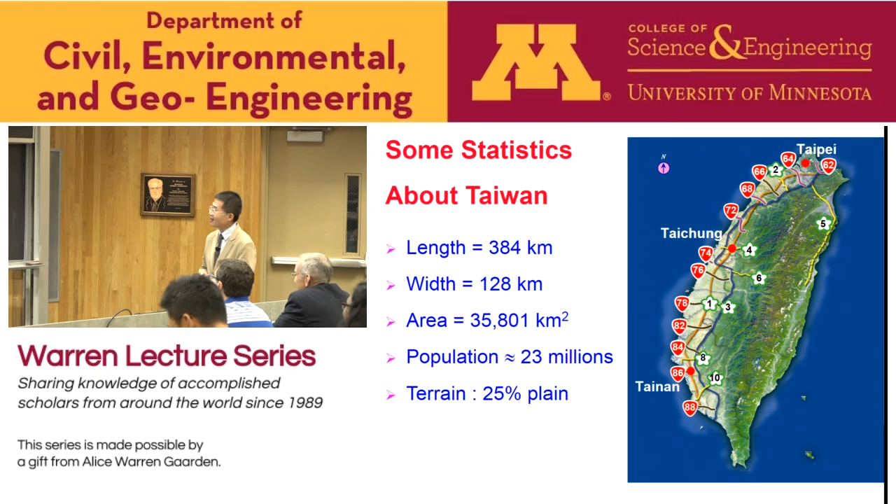Taiwan has a population of about 23 million people. It's one of the most densely populated areas in the world. The shape of Taiwan is like a sweet potato, so people in Taiwan like to call themselves children of the sweet potato.

That's Taiwan. Taiwan is characterized by the contrast between the rocky mountains in the east and the flat plain area in the west, where most highways are built. This number here indicates the highways.

We have three big cities: Taipei, Tainan, and Taichung. Tainan is the city where I come from.

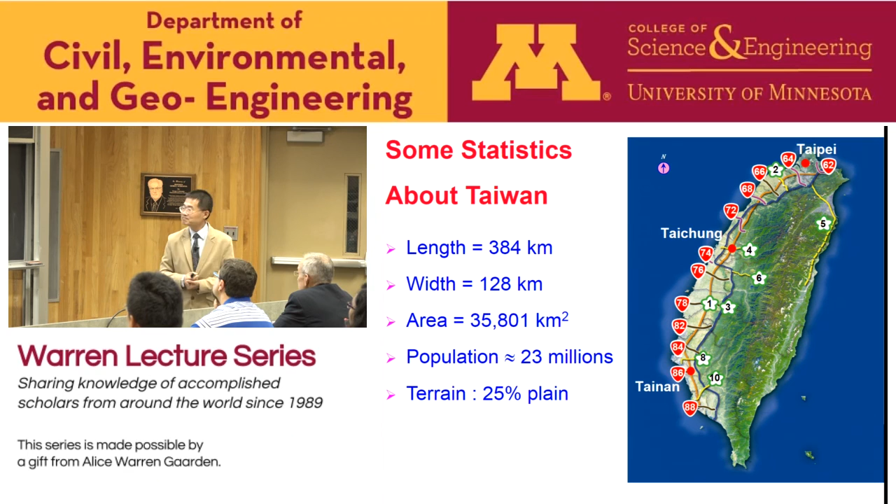Because of its magnificent landscape and cultural diversity, Taiwan attracts many visitors from around the world. Professor Marastino's daughter went there last year, and Professor Gananovich went there two or three years ago. Last year we received about 10 million international visitors to Taiwan.

A military leader, Chen Kung, recovered Taiwan from the hands of the Dutch and began his reign in Taiwan from Tainan. My university, National Cheng Kung University, is named after his given name, Cheng Kung, meaning successful.

It's now located in the eastern part of Tainan city. National Cheng Kung University, NCKU, was originally established during the Japanese colonial era, called Tainan Technical College at that time, established in 1931. NCKU right now serves 21,000 students, with 9 colleges, 39 departments, and 49 graduate institutes.

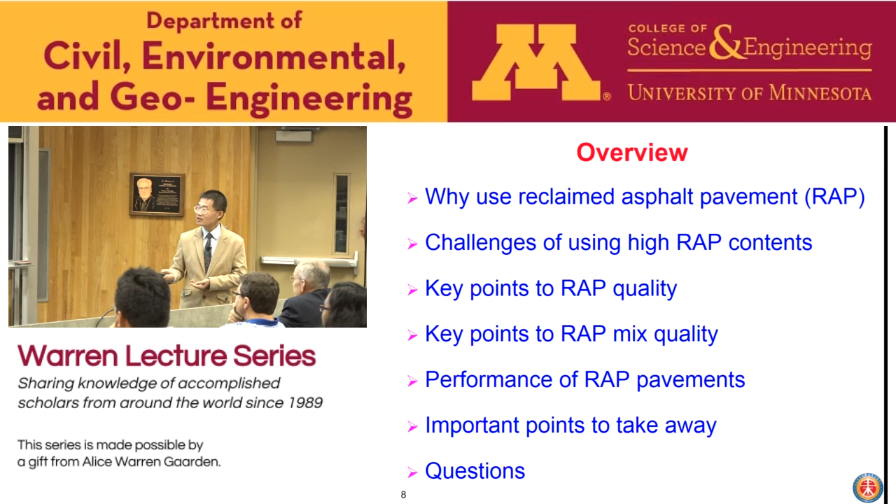Asphalt trivia. How many metric tons of hot mix asphalt, HMA, mixtures are placed per year in the U.S.? Any guess? A billion? That's the total metric tons put in the U.S. right now. That's a good guess.

According to a survey conducted by NAPA in 2013 - NAPA stands for National Asphalt Pavement Association in the U.S. - the amount of HMA mixtures placed per year varies from year to year, depending on road condition and budget constraints. On average, there are about 400 million metric tons of HMA placed per year in the U.S.

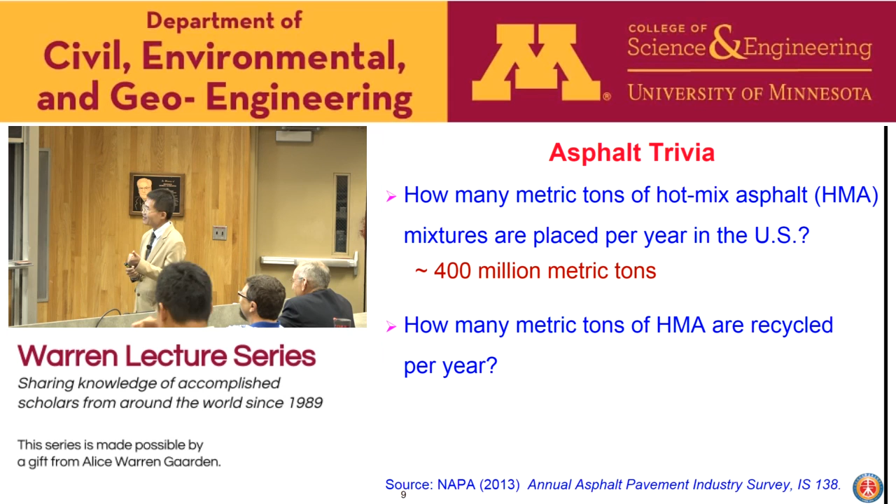The next question: how many metric tons of HMA are recycled per year? 200 million? That's a good guess. Excellent. According to that survey, it's over 70 million metric tons of HMA recycled per year.

So asphalt pavement is the most recycled product in America. The next two most recycled products are steel and paper, with 60 million and 30 million metric tons per year, respectively.

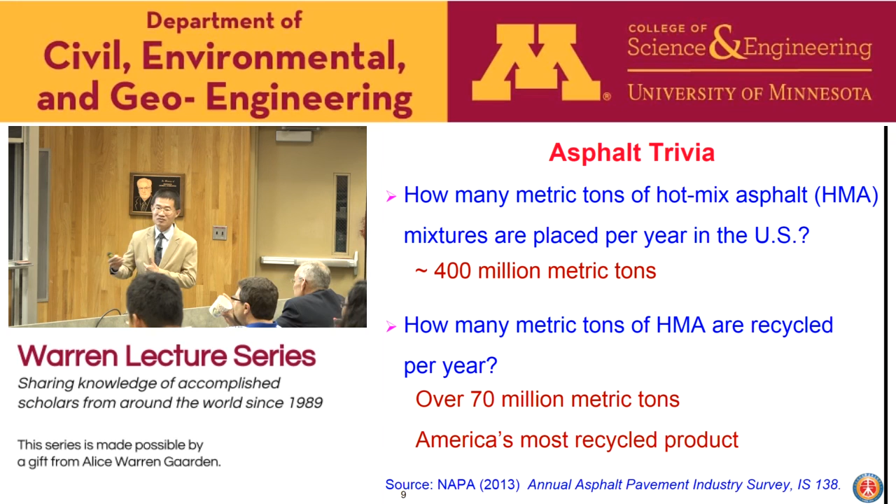Reclaimed asphalt pavement, RAP, is generated when asphalt pavement is milled using a milling machine with a cutter to cut the asphalt pavement, or full depth removed using bulldozers for reconstruction and resurfacing purposes.

Why do we use RAP then? Recycling asphalt pavement first became popular in the US in the 1970s during the oil embargo, because the price of crude oil skyrocketed at that time. RAP is a viable alternative to virgin materials because it contains residual asphalt cement, usually in the range of 3% to 6% by weight.

From the contractors' viewpoint, high RAP content results in lower mix cost. The use of RAP also conserves energy and lowers the transportation costs required to obtain quality aggregate. Also, using RAP preserves natural resources such as virgin aggregate and virgin binders. So optimally, recycling asphalt will create a cycle that sustains the environment.

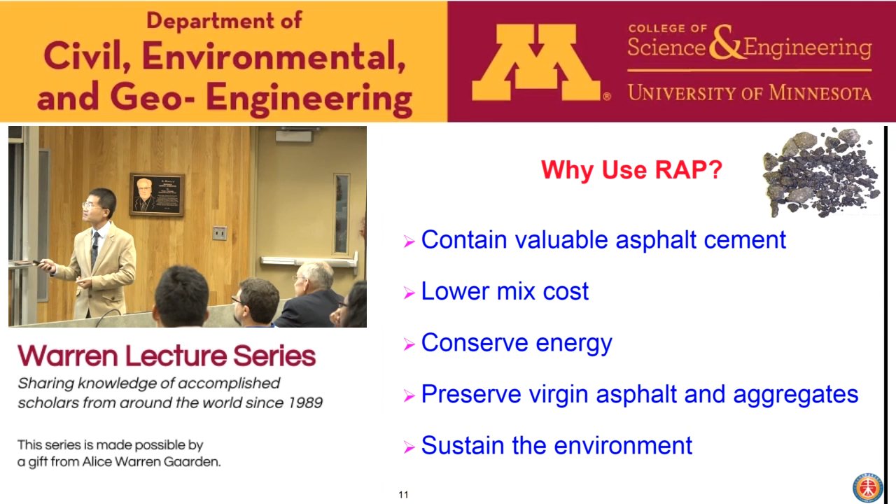As highway agencies around the world are pressured to be greener and to further the use of environmentally sustainable products, we look at ways to increase the use of RAP in HMA mixtures. An upper limit on the amount of RAP that can be used is usually specified in the specifications. On average, the US uses a little bit more than 20% RAP in the wearing course, which is on the surface. Japan successfully used, on average, 47%.

In Taiwan, the maximum RAP we can use is 40%. The technique I'm going to talk about today is based on what we have in the Asian area, so it's a little bit different from what we practice here in the US. High RAP content is defined as more than 25% RAP in an asphalt mix by weight of the total mix.

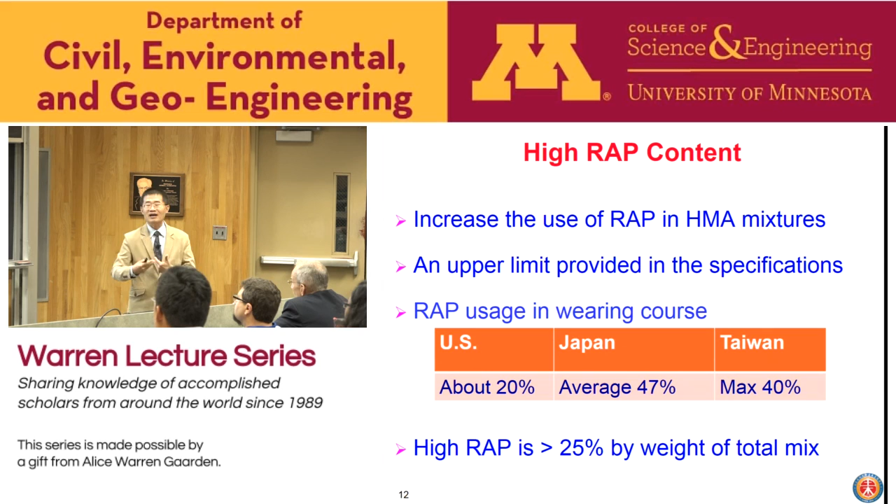The question we are posing now, actually around the world, is: how can we put in more RAP and ensure that these higher quantities do not adversely affect the long-term durability and performance of our mixtures? That's really a big issue.

Besides academic development, which we are doing right now, I feel the biggest impact can be made in the processing and production in an asphalt plant. That's why I will focus on today.

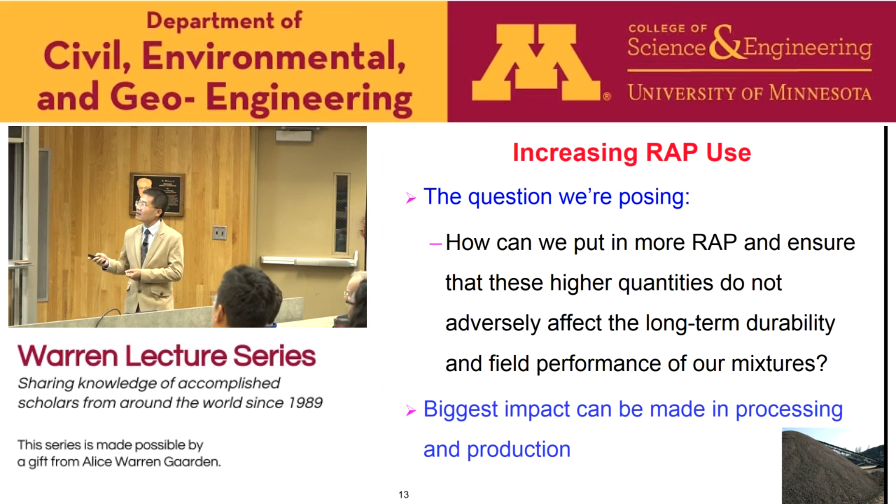Combining high RAP with virgin aggregate introduces unique challenges when the RAP contains aged asphalt and may act like a black rock. If the RAP material is a black rock, the aged asphalt has no interaction with the virgin aggregate at all.

Now, how much could the aged asphalt in RAP be mobilized to blend, so that the aged asphalt can be used and therefore reduce the amount of asphalt cement needed? Another perspective is: how can we improve the interaction between the old binder and new binder in the asphalt plant? These are the challenges we face in academia as well as in the paving industry.

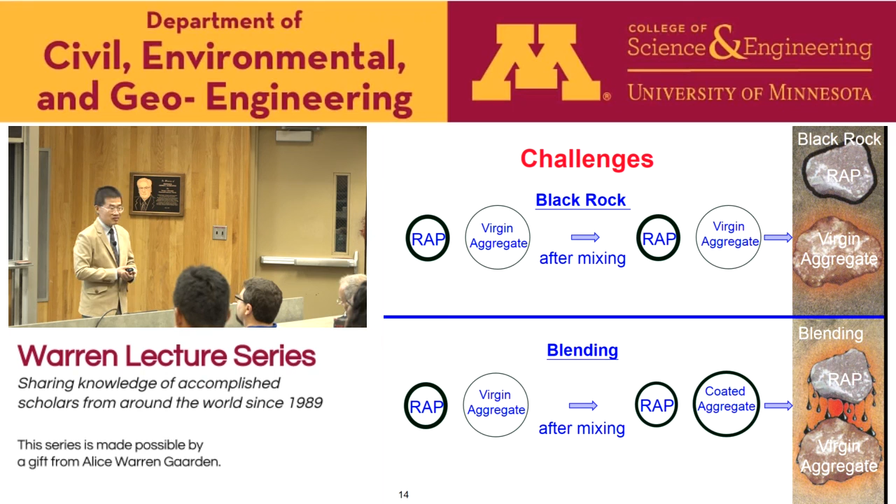Using high RAP contents in an asphalt mix usually requires that a recycle agent be used. The recycling agent can be divided into a softening agent and a rejuvenating agent.

The softening agent is a softer asphalt cement, such as PG 58 minus 22 instead of PG 64.

Minus 22, that's what we use here in the US, using PG grading systems for asphalt. But in Taiwan we still use traditional viscosity grading systems, so we use AC10 as a softening agent instead of AC20.

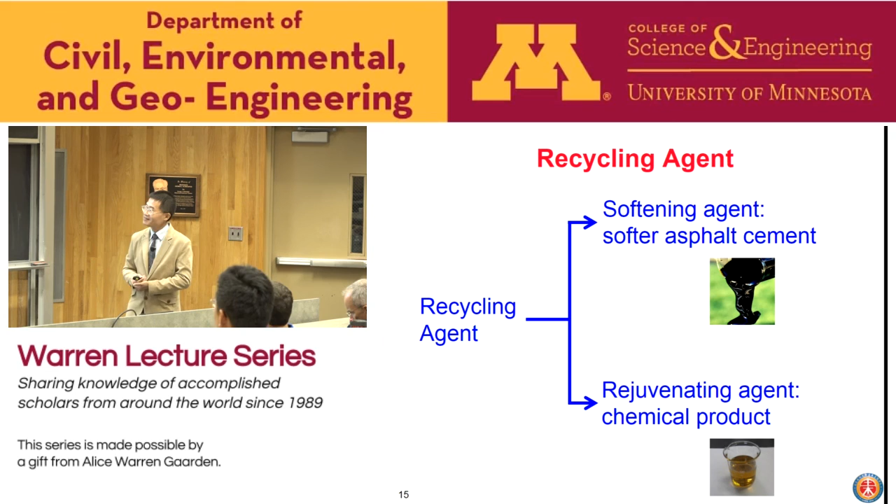The rejuvenating agent here is a chemical product aimed to restore chemical and physical properties of asphalt cement, of aged binder actually. This table provides the specifications of rejuvenating agents.

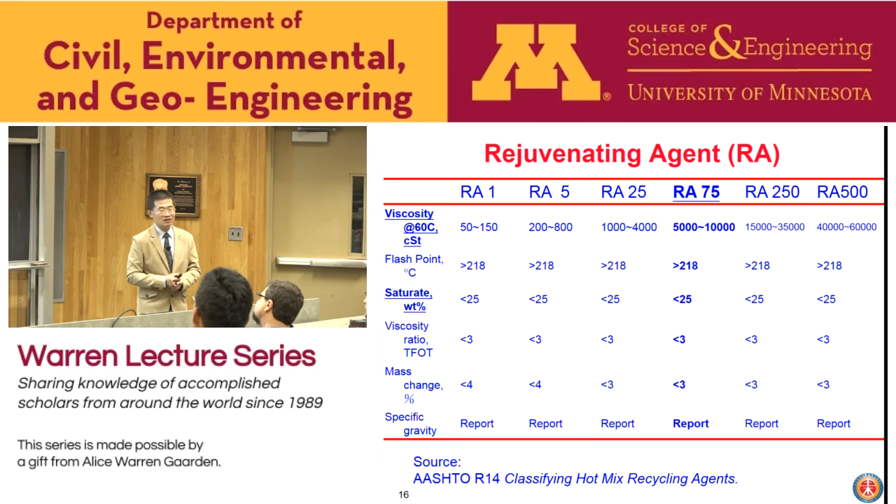according to AASHTO classification. In this study I'm going to present, we use RA75 with a viscosity value ranging from 5,000 centistokes to 10,000 centistokes at 60 degrees Celsius.

So that's the rejuvenating agent. Guidelines for the use of the asphalt recycling agent can be found in the AASHTO specifications.

When the RAP content is less than 15%, the contribution of the RAP is too small to make any difference, so there's no change in binder selection.

When the RAP content is between 15 and 25%, the new binder should be a softening agent, as I mentioned previously, and that should be dropped one grade lower than the normal one.

So in this case, we use AC10, which is pretty much equivalent to PG58 minus 22 here in the US. It's about the same grade.

And when the recycled binder content is more than 25%, a blend chart should be used to select the recycling agent.

Usually it's a rejuvenator. All these selections are based on an assumption that significant blending exists between the old binder and the new binder. That's the assumption made in this table.

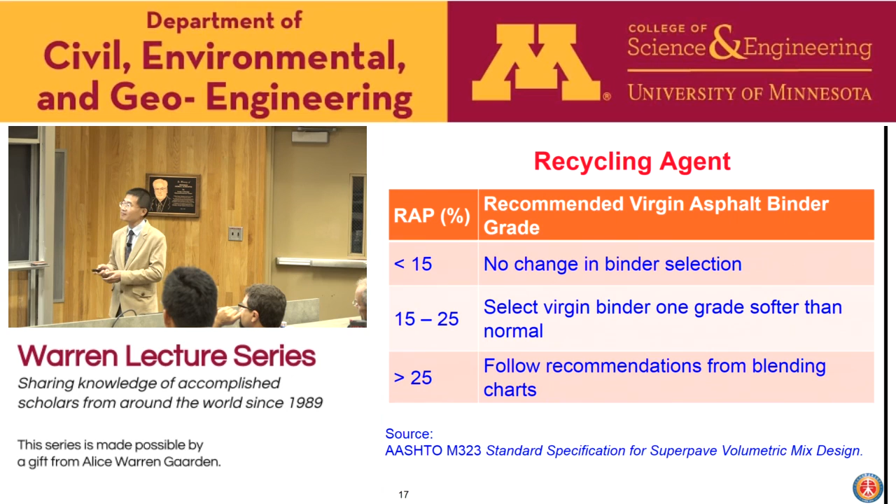Therefore, the project I'm working on is a test road that was completed in 2014 to monitor how asphalt pavement with a high RAP content will perform under real traffic and environmental conditions.

Three test sections are included in the test road: 0% RAP, 40% RAP, and 10% RAP.

The 0% RAP test section is used as a control test section where all virgin materials are used. For each RAP content, a 300 meter test section was constructed.

This route has an average daily traffic volume of approximately 1,200 vehicles with 12% trucks.

Each section consists of 10 centimeters of dense graded asphalt over 30 centimeters of crushed aggregate base. That's how we constructed it.

Using this test road as an example, I would like to show you how we control the RAP quality and RAP mix quality.

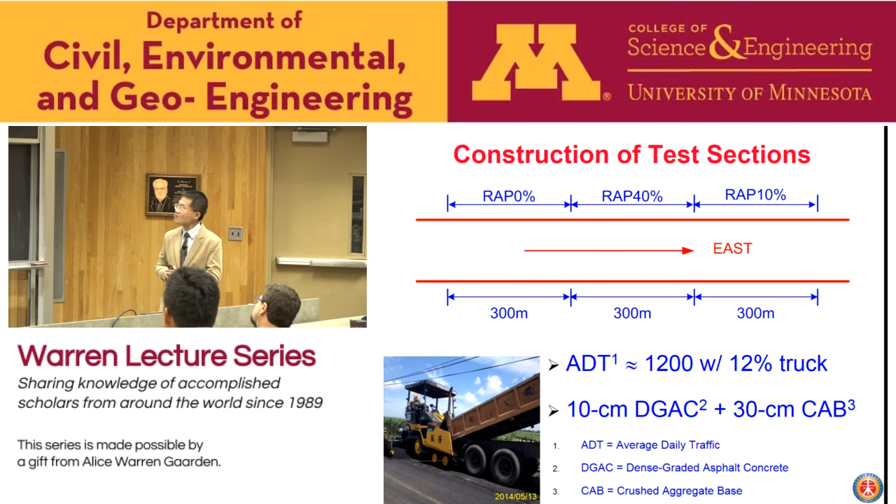It's essential to crush and screen the RAP materials under a roof to keep the RAP material dry, and we take great care to minimize water usage during the crushing operation.

To maximize RAP usage while still meeting gradation, volumetric, and mechanical properties, it's necessary to fractionate RAP into at least two sizes.

So in this study, the RAP material is split into at least two sizes.

The coarse RAP material, which stays on the 12.5 millimeter sieve, and the fine RAP material, which passes the 12.5 millimeter sieve.

The recycling of previously recycled pavement is called asphalt re-recycling. Asphalt re-recycling has now become widespread, yeah.

But currently there's little scientific knowledge about how, and how many times, asphalt pavement can be recycled while maintaining its durability. That's the issue.

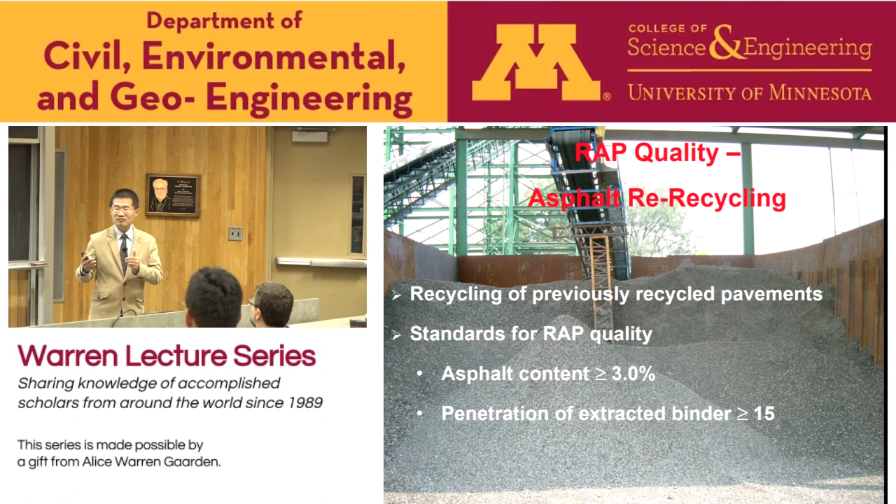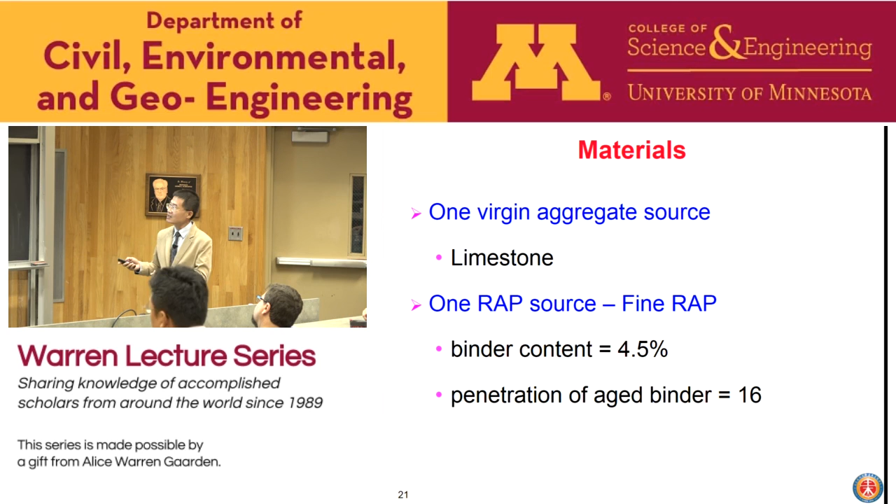Three RAP contents were used: 0%, 10%, and 40%. One rejuvenating agent, RA 75, was used for the 40% RAP test sections. Two virgin binders were used: AC20 was used as a control for the 0% RAP test sections, and AC10 was also used as a softening agent for the 10% RAP test sections.

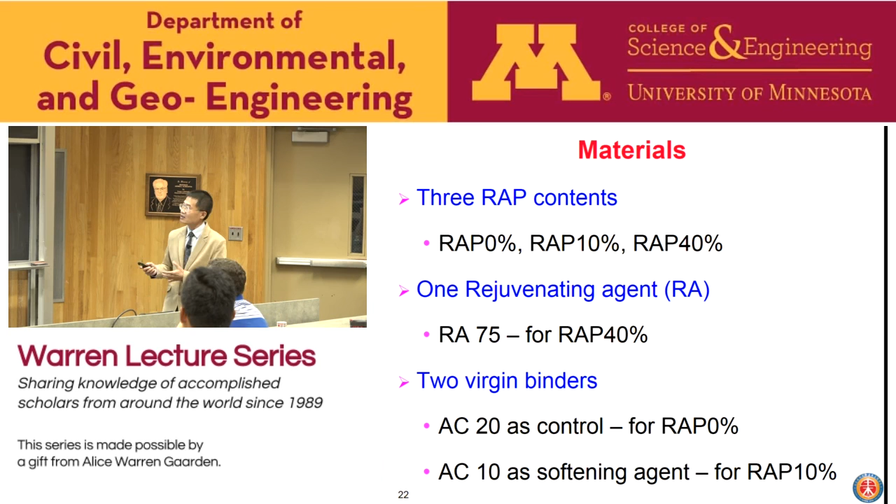A detailed explanation of RAP mix design is beyond the scope of today's presentation, but the basic principle is that asphalt pavement with RAP and without RAP should meet the same requirements. This figure shows the aggregate gradation for all the mixtures used on the test road. The nominal maximum aggregate size used was 19 millimeters, and the asphalt content was determined to be 4.9% for all the mixtures we used. We maintained the same asphalt content throughout.

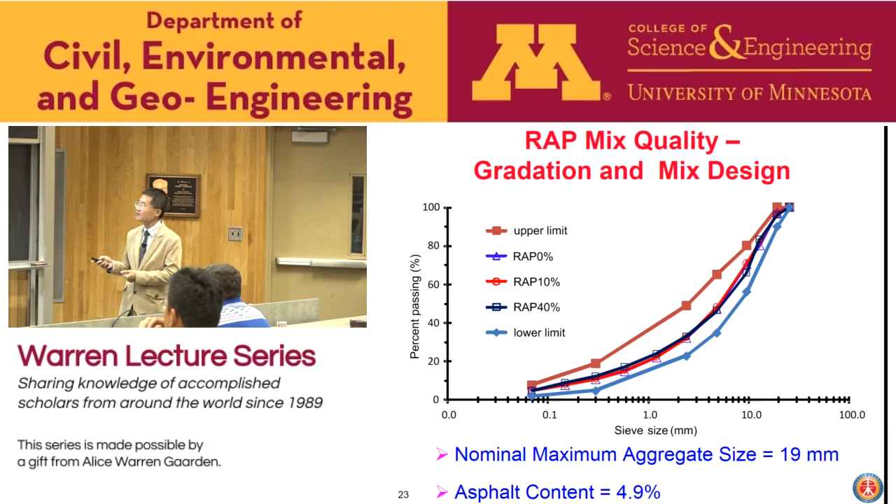A blending chart was used to determine the required grade of the recycling agent, and the target viscosity we used was 2,000 poises at 60 degrees Celsius. That's a control point for all the blended asphalt used in the mixtures, so that's very important - we use 2,000 here as the control point.

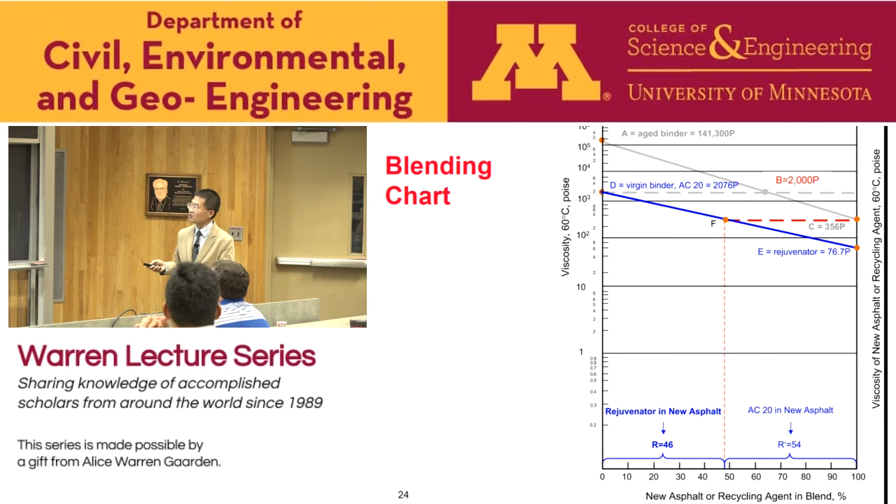The binder replacement ratio is defined as the percentage of RAP asphalt content divided by the total asphalt content in an asphalt mix. The use of a rejuvenating agent would increase the binder replacement ratio to about 36.7% for the 40% RAP sections. So what I'm saying is that the use of a rejuvenator will make the recycled asphalt concrete greener - you can put more RAP in if you use a rejuvenator.

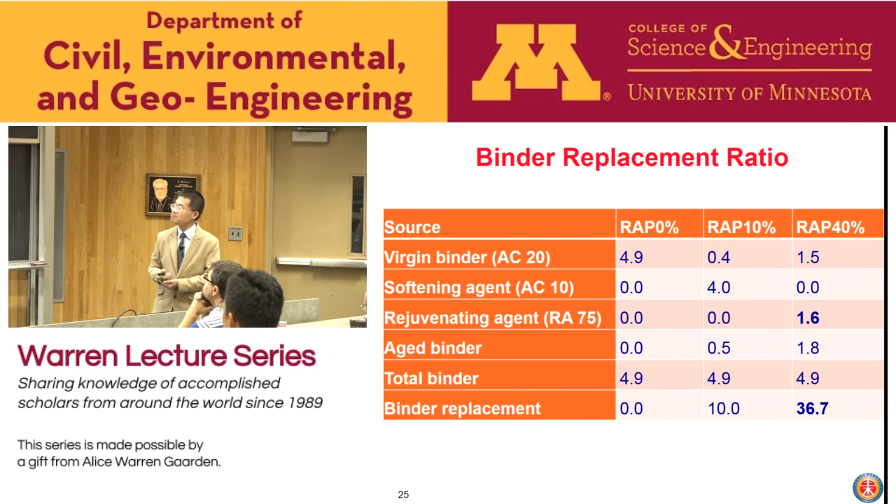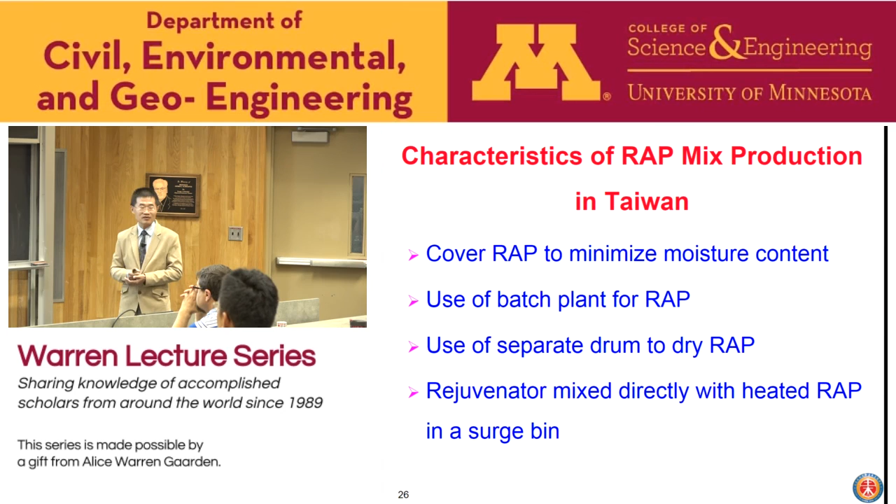There are four major characteristics of RAP mix production in Taiwan that might be different from the practice used here in the US. The moisture content in RAP will be kept minimized using a roof cover. A batch plant is used for RAP mix production in Taiwan instead of a continuous mix plant used in the US. A separate drum is used to dry and heat the RAP materials, and the rejuvenators will be mixed directly with the heated RAP in the surge bin. These are the four major differences. I would like to illustrate all these characteristics using the following slides.

In general, it takes 10 liters of fuel per metric ton of aggregate to remove 5% moisture content and heat the asphalt mixture to a mixing temperature of around 160 degrees Celsius. So moisture in RAP will take more fuel for drying the same amount of water. Using a cover would keep the moisture content of the RAP stockpile below 2% - that's a significant reduction.

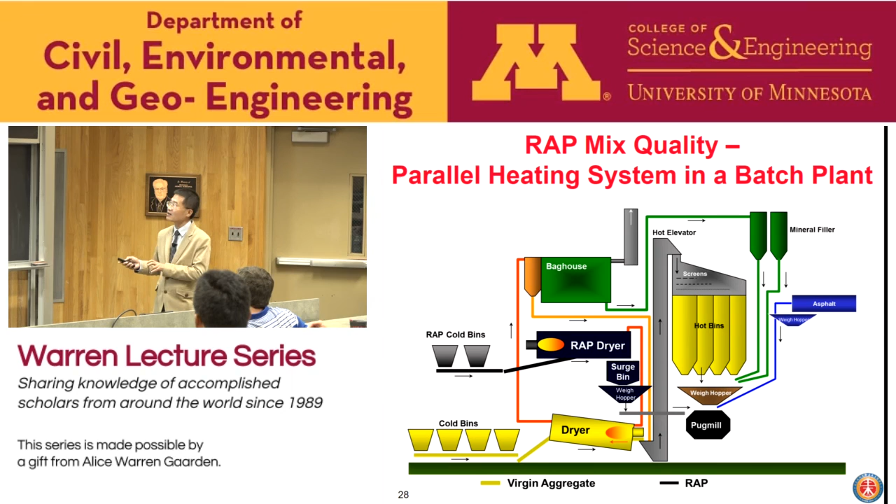This photo shows the RAP dryer for the production of asphalt mixture with high RAP content. The RAP material comes in underneath here, and it is indirectly heated in the dryer because we have a hot air stream coming back from the gas chamber.

The RAP material is then transported to this surge bin, where the rejuvenator is mixed with the RAP material for about 2 hours in our study. The merit of conditioning the RAP material is that it allows the rejuvenator to diffuse into the aged asphalt in the asphalt plant.

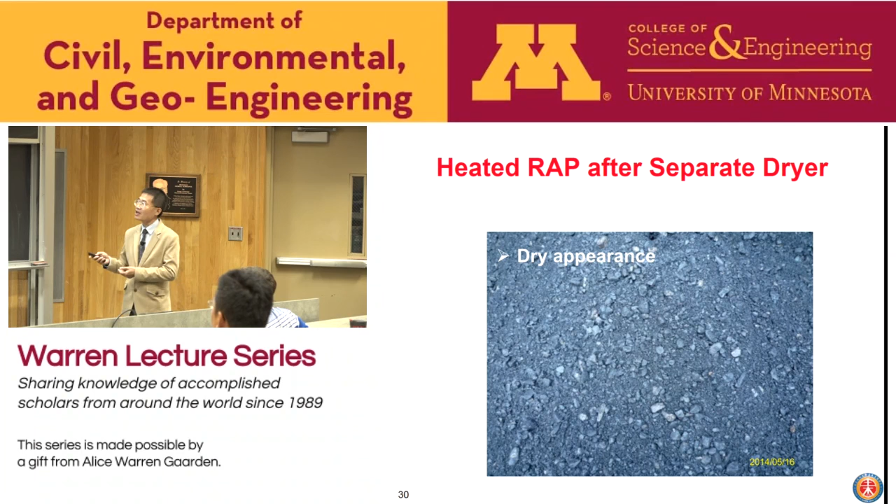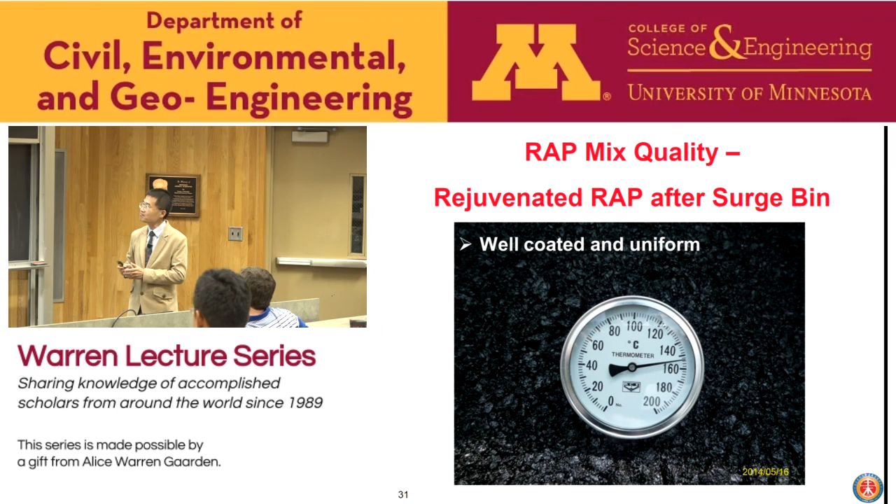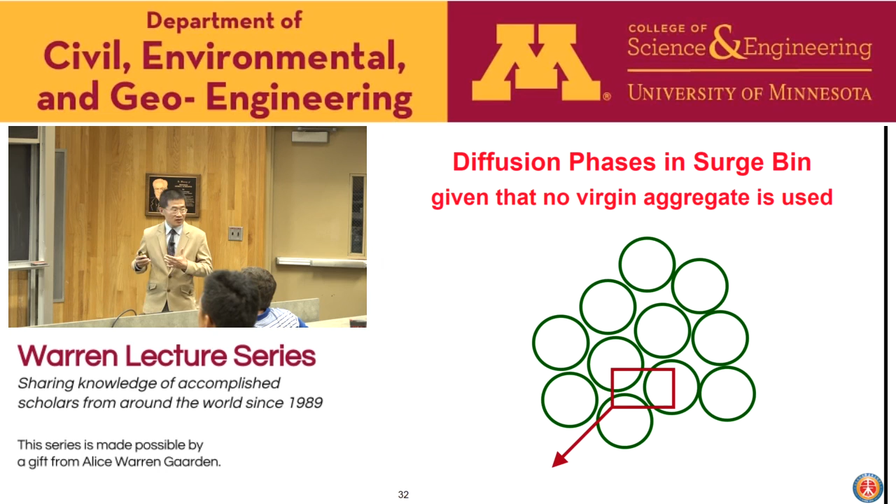The diffusion process of a rejuvenator in a surge bin can be described in 3 stages, given that no virgin aggregate is used here. In the beginning, the rejuvenating or recycling agent forms a low viscosity layer, coating all the RAP material that's still coated by the aged asphalt here.

At this stage, asphalt mixtures with high RAP content might be subject to rutting, because the recycling agent acts like a lubricant. So that's what will happen.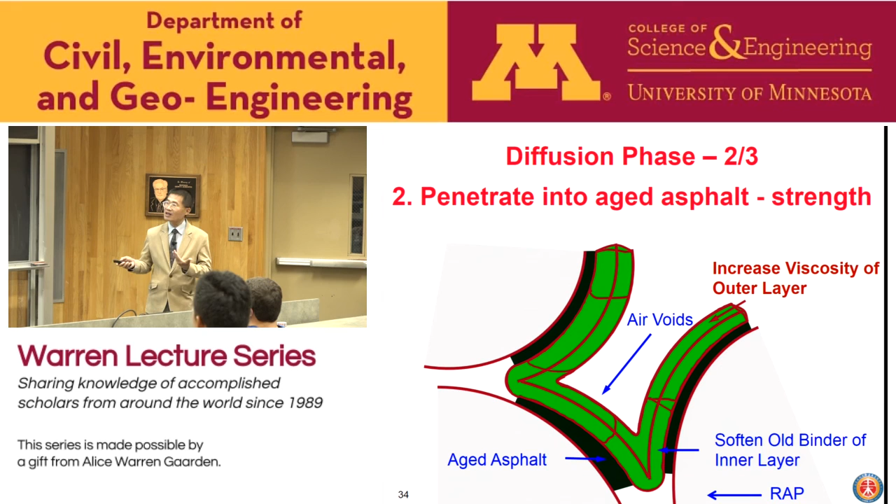Then gradually the recycling agent begins to penetrate into the aged asphalt, increasing the viscosity of the outer layer. At the same time, it also softens the binder in the inner layer. The asphalt mixture with high RAP content will start to develop strength to carry traffic loading at this time. Eventually, the rejuvenator blending will approach equilibrium.

The asphalt mixture with high RAP content will be able to develop sufficient strength to provide resistance to traffic loading, thermal cracking, or fatigue cracking. This is the final stage we want to have with high RAP contents.

All of this can be done in parallel heating systems. So the key point in my presentation is that careful selection of the recycling agent and the use of parallel heating systems will shorten the diffusion time and develop strength more rapidly. That's what we try to use here for the asphalt mixture with high RAP content.

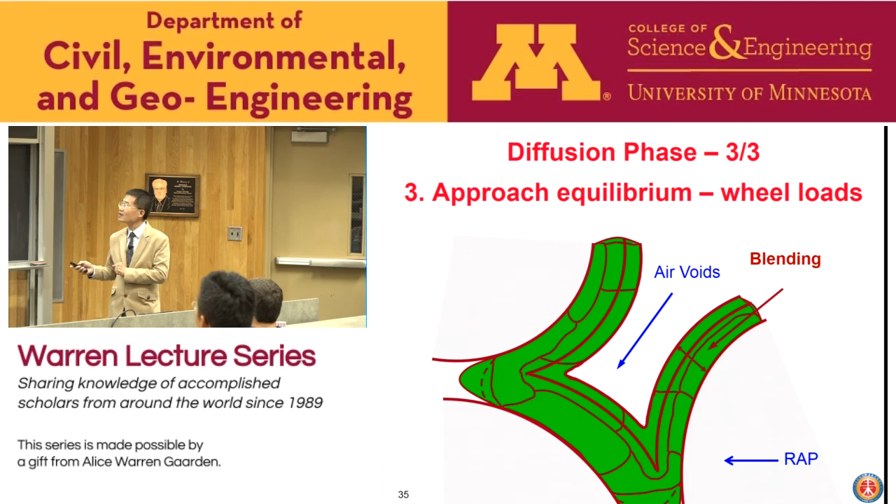Surveys of pavement performance, including rutting, friction resistance, ride quality, and cracking, were conducted at scheduled intervals.

I've been fortunate to have excellent graduate students working with me throughout my academic career, and I would like to acknowledge their efforts in all this work. They're working really hard. It's summer in Taiwan, the temperature can run as high as 120 Fahrenheit, and humidity is approaching 100%. That's a difficult job they are doing here. No, I'm not kidding, really. I'm out with them. It's difficult work.

I will not mention all the pavement performance characteristics. I only use 2 performance measures that I will present in this talk.

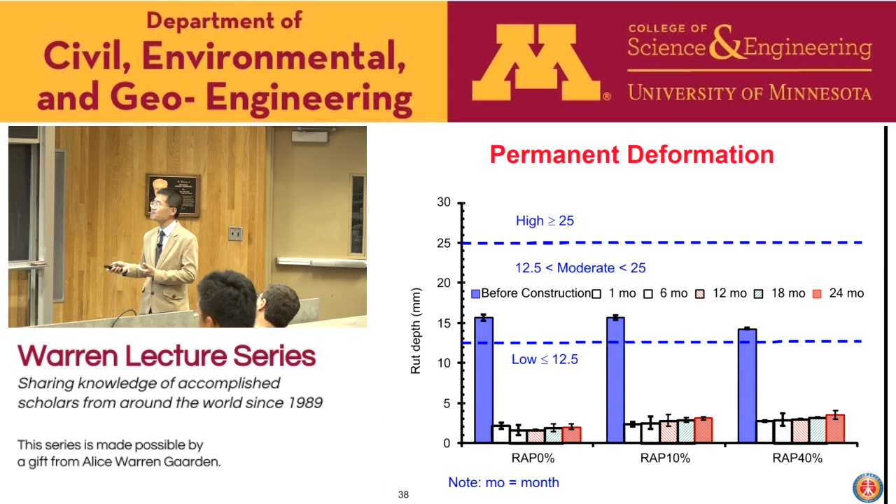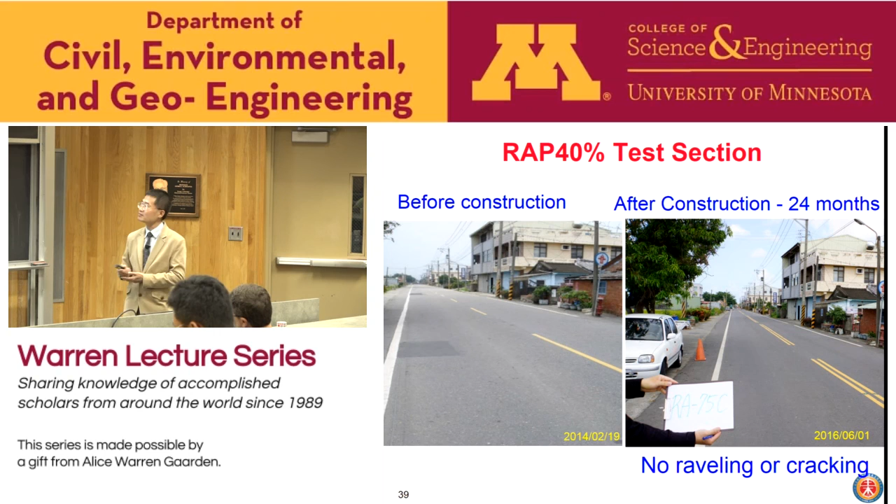I would like to conclude my presentation regarding RAP quality. I think it's important to minimize water usage during the crushing operation for the RAP materials. Fractionating RAP into at least two sizes will improve the RAP quality. It's also important to establish standards for asphalt re-recycling materials, and covering a RAP stockpile on the roof will minimize moisture content.

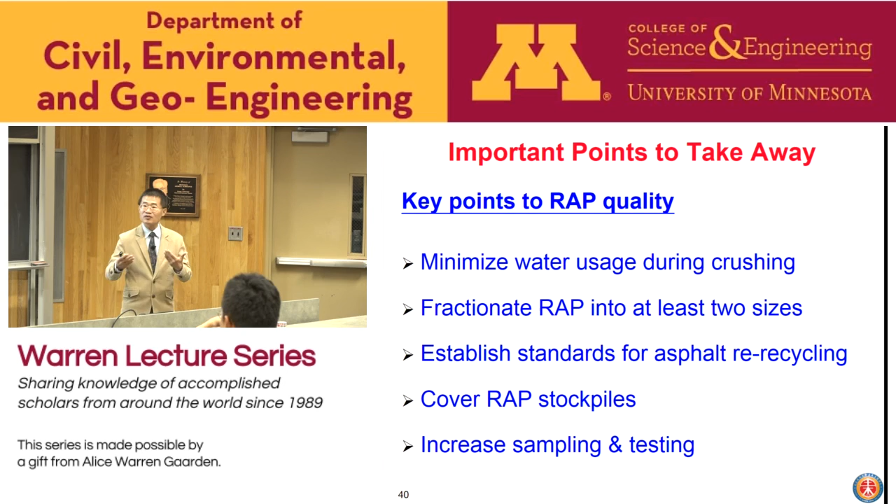Increasing sampling and testing frequency will ensure the quality of RAP material is uniform. In terms of RAP mix quality, heating RAP in a separate parallel flow dryer and mixing and conditioning it with a rejuvenator in a surge bin would address the blending issue, which is critical for asphalt mixtures with high RAP content. So we try to address this issue using these two concepts in our study.

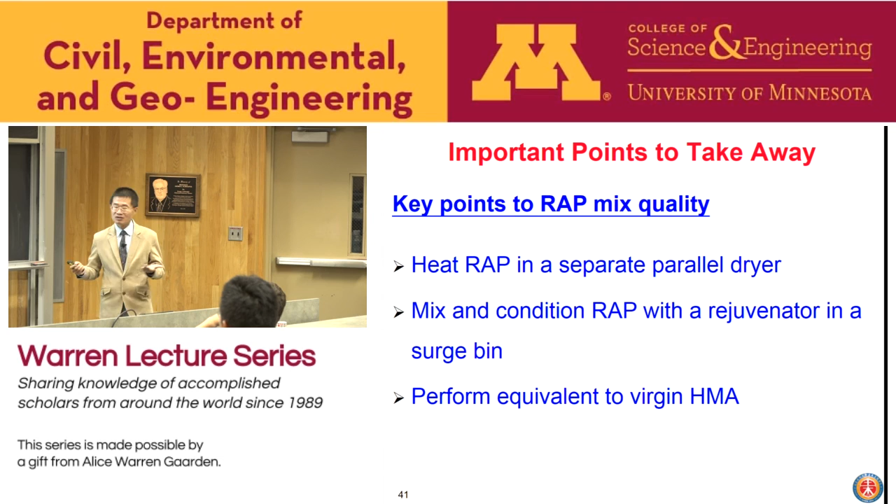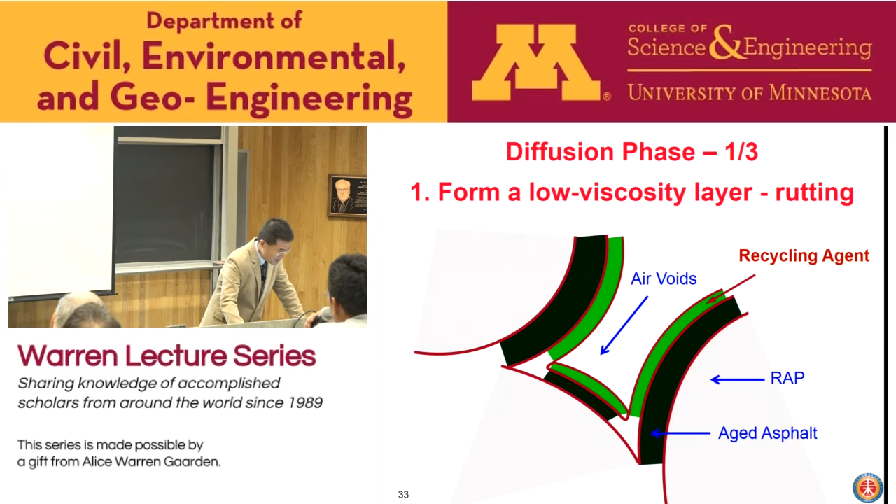Perhaps on a per volume or per ton basis, what is the energy cost for RAP versus the energy cost for virgin aggregate in terms of preparation? Is it comparable, or does RAP require more energy, assuming that it's covered and we followed your recommendations? That's another good question, you are talking about the carbon, sort of this life cycle assessment issue here.

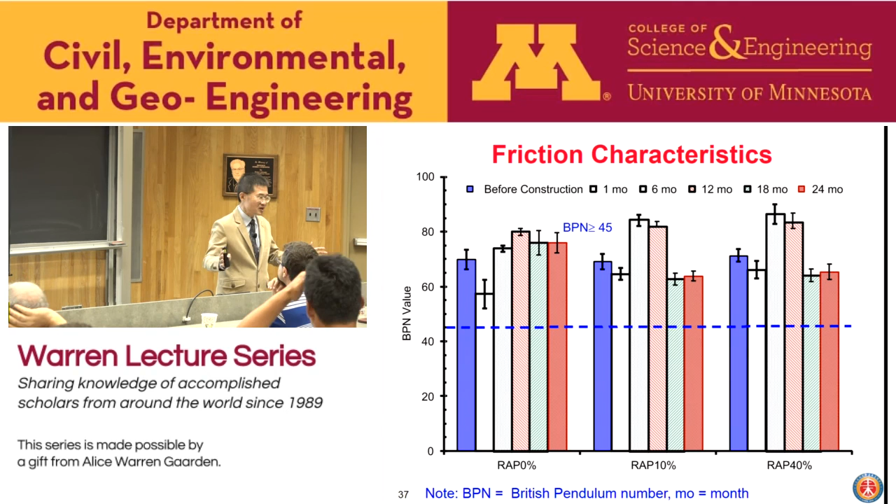I'll answer this question first. You're right, the quality of aggregate plays an important role in pavement life. In Taiwan, for my study, we check the quality of aggregate, primarily the abrasion value, which should be lower than 30 or 40. That's the checkpoint we use. Pretty much what we have in Taiwan is limestone. I went to visit the asphalt plant here the other day and saw a variety of aggregates used in Minnesota. That opened my eyes. It's amazing, why are there so many of them? Probably there are rich resources here, but again, I think it comes down to the aggregate properties they use and whether they meet the requirements. I would say shape, angularity, and abrasion values are three important issues. I will look into it.

Thank you. Second question was on laboratory performance testing, such as fatigue testing or complex modulus, to predict performance, or at least as part of the mix design procedure to look at relative performance between different rejuvenators or RAP contents. Are you doing any work in that area? It's something that's just taking off in this country, and I'm curious what your experiences have been.

Yeah, I haven't done that yet. I mean, you are right, we should have this test done to check the fatigue property, all the mechanical properties for the RAP mix with the rejuvenator, but we haven't done it yet. So thank you for the question.

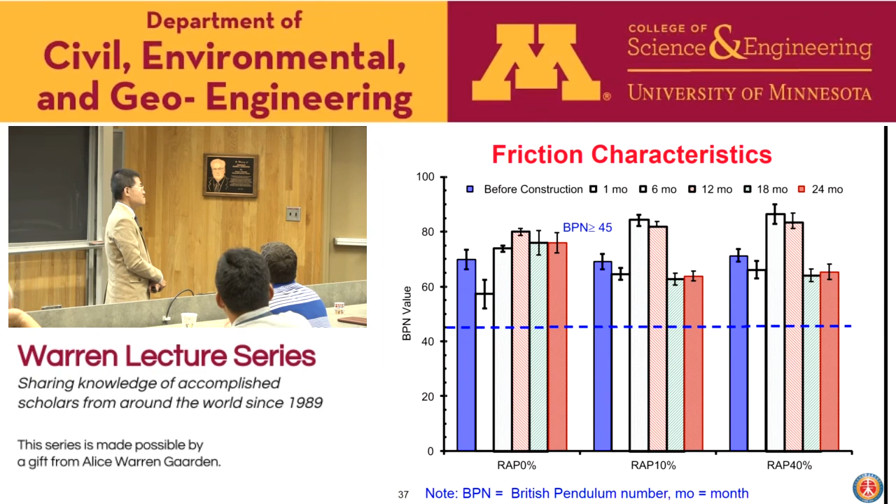Any more questions? Well, I can ask you one last question then. You said from academia to industry, so what can academia do to improve the quality of our pavements, in this particular case asphalt pavements, with high amounts of RAP? Do you have any thoughts, that's what you said in the title, and what can we do here at the university, working with our graduate students, with our colleagues from industry, and from the Department of Transportation?

Okay, I would like to mention a little bit the background of this project. At that time when this project started, I went to the Taiwan Highway Bureau to talk about this project with them. I pointed out that we have used RAP for such a long time, actually high RAP contents, with rejuvenating materials. People at the highway agency listened to my proposal, and they started this project. So this was my first time to be in contact with the paving industry, because I was in charge of this project. I went to the asphalt plant and told them what they should and should not do, and it's difficult. It's difficult to deal with them because they have their own ways of doing things. I have to get around with it.